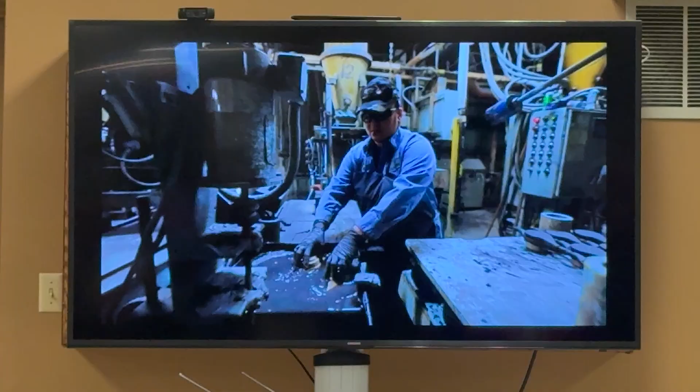So Fall River Foundry, we've been in business for 72 years. We were founded in 1953.

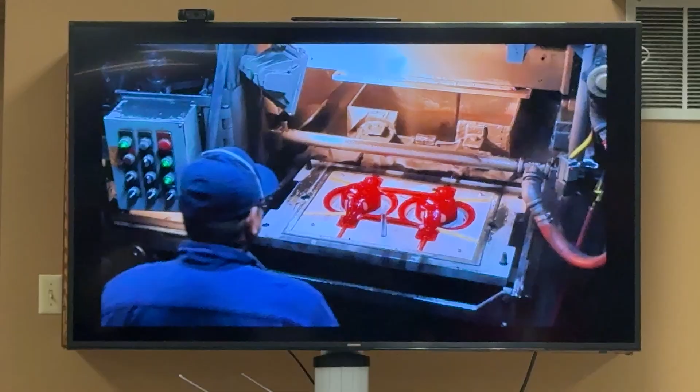I guess we'll just let this play out for a second. Yeah, a cold day.

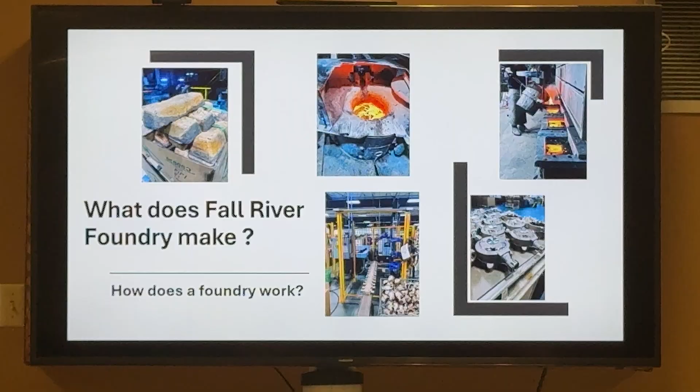All right, on to the history of Fall River Foundry. Again, I'm Brendan Weigel, President and CEO of Fall River Foundry. I'm going to do a quick overview of what we actually do.

We're a green sand foundry, that's what we're referred to as. So we're a green sand brass foundry, and what they mean by green sand is we use silica sand to produce our castings. We basically take what looks like beach sand, mix clay into it, and pack that into our molds, and that's what we use to create our castings. If you look back on the table, I actually brought a core with us too, which makes the internal geometry of our castings. That's a chemically bonded process, but everything we use is sand related at Fall River.

We primarily deal with the waterworks industry, so our forte is making water meters. So if you live in the city and you have a water meter in your house made out of brass, odds are we made it.

We were founded in 1953, and we actually were spun off from Badger Meter. Here's some of Badger Meter's original advertisements. Badger Meter was owned by a fellow named Charles W. Wright, and in 1952 he unexpectedly passed away. He was the sole owner of Badger Meter. So his twin sons took over the company, and in 1953 they elected to split off the foundry they had in Milwaukee. James Wright took over Badger Meter operations, and William Wright built Fall River Foundry.

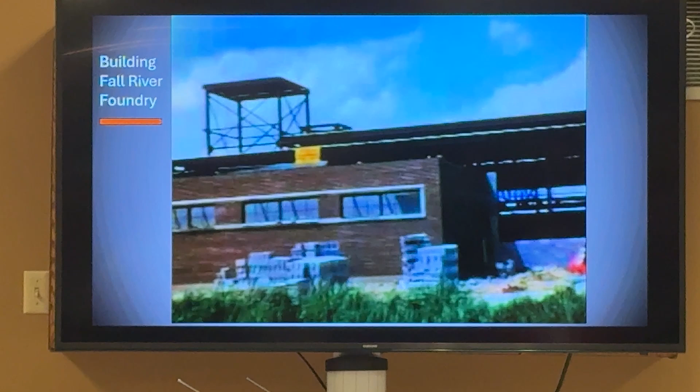Construction started in 1953, and we do have a video of that. There's the original building, this is from 1953. This is actually when the building was under construction. There's a YouTube link to this as well, which is pretty cool, looking at how they built heavy industry buildings back in the day.

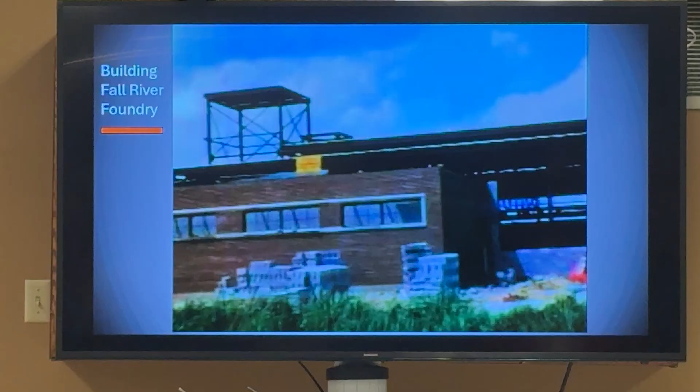Oh, we can't get the video to play, but that's fine. Anyway, William Wright started Fall River Foundry as sole owner. It started construction in '53, and had an open house in 1954, I believe in January.

Yeah, so the Columbus Journal Republican had a souvenir paper. We have a bunch of those still in our archives, but you can see January 2nd they had an open house. Operations didn't start then.

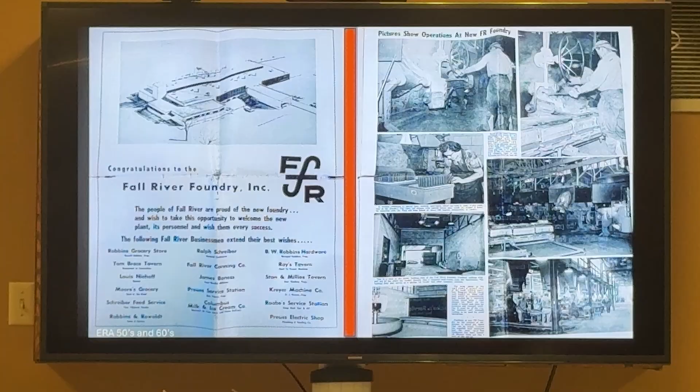It must have been that they had the equipment installed, and at the time it was kind of a showpiece for Fall River, with a foundry being built. Yeah, just some more of the original open house literature. And this is one of our molding lines - I'll get into this a little bit later.

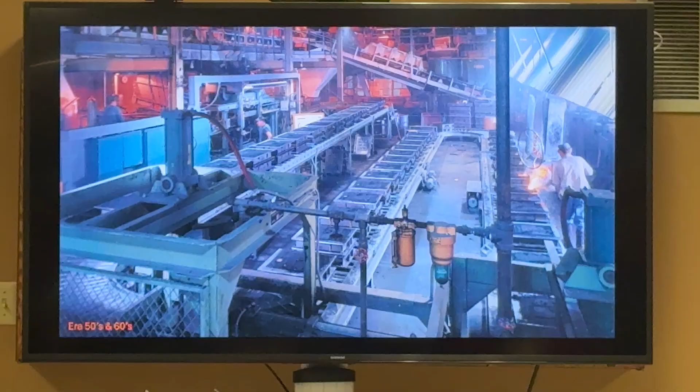So if you look back on the table, you'll see some of the old items that we have. But what's really priceless to me is I actually have the first mold ever poured in the foundry. It was poured in August of 1954. It was presented to the president at the time, and we've kept that. It's actually home on a shelf in my office.

Yes, we had the open house in 1954. So starting out, you had the two brothers, one having Badger Meter, one having Fall River Foundry. There was an agreement that Fall River Foundry would produce all of Badger Meter's castings, which we still do today. That was the start of Fall River Foundry.

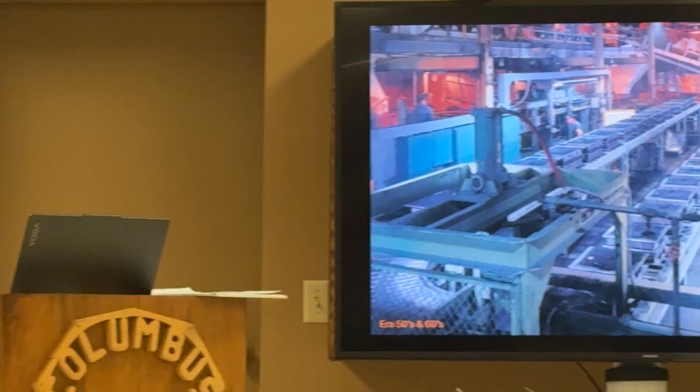Throughout the 60s, Fall River Foundry primarily just did work for Badger Meter. There was a little bit of jobbing work, and when I say jobbing work, that's producing castings for OEMs. We do not produce our own product - we produce castings, and now we machine them as well, for OEMs.

So when I say OEMs, like the water meter companies, we also do fire hydrants. Believe it or not, they make full fire hydrants out of brass, which is pretty cool. A lot of trim parts, a lot of fire protection. And if you look back on the table, we actually do cemetery bases as well - kind of a dying industry.

Throughout the 60s, we were primarily doing work for Badger Meter, a little bit of jobbing work, and this molding line was one of the first automatic molding lines put in a brass foundry. That was done during the 60s, and it really helped us progress in our production capabilities. Our output was much better because of it.

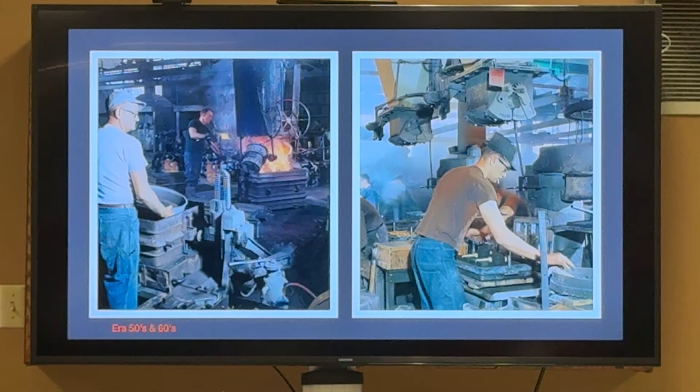Here's manual molding, so you can see it was done by hand. The sand was packed into molds by hand, which we still do today in part of our foundry for shorter runs. In the background of one picture, we're pouring the mold manually with a ladle. Those hold roughly about 300 pounds of metal, which we still use today. We've carried that tradition on and had a lot of skilled workers.

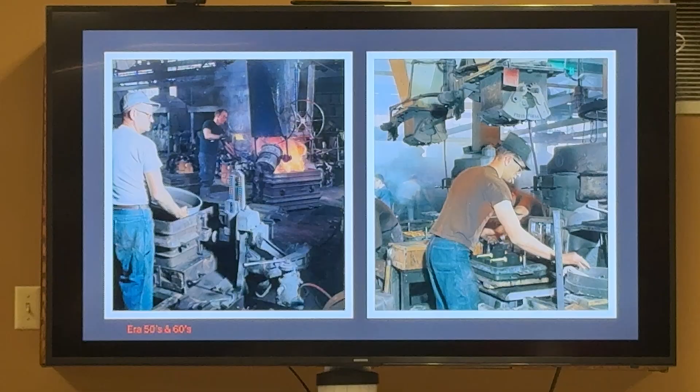The individual here, Russ Milkey, worked well into the 2000s, worked for us for well over 50 years. And we have a number of employees that have worked for us over 50 years.

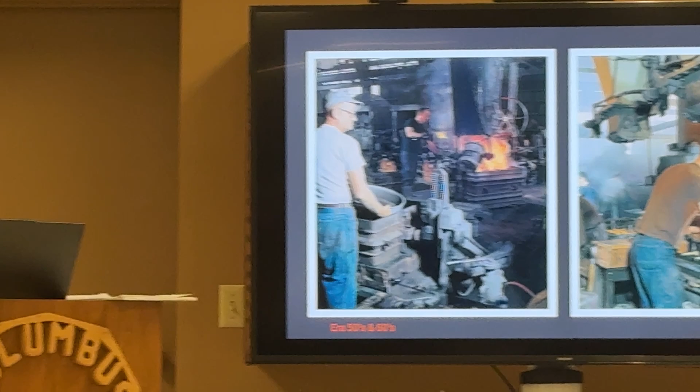The 1970s came around. My father, Ray Weigel, joined Fall River. He actually came from Milwaukee Valve when Milwaukee Valve had their foundry in Milwaukee. He was a plant superintendent, so he came to Fall River as plant superintendent, and over the years eventually became CEO and co-owner of Fall River Foundry.

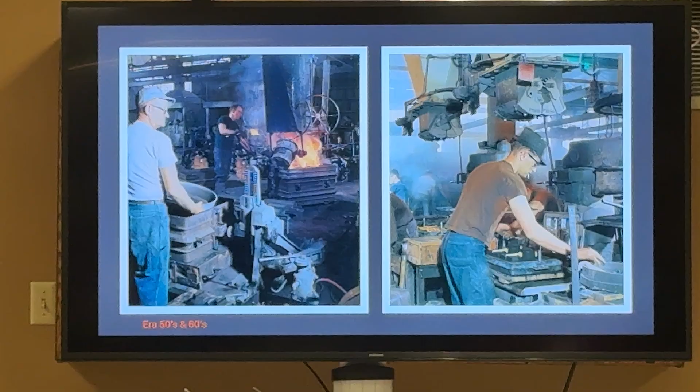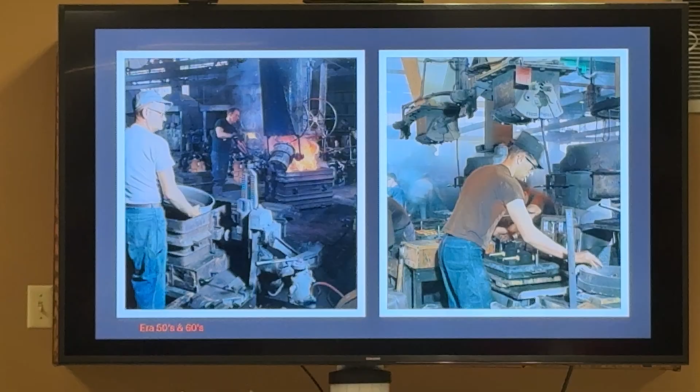Bill Wright's son, our original founder, Charlie F. Wright, took over ownership for the Wright family. He was somewhat involved in operations, but more on the financial side, so he actually started up some funds. He never was really directly involved in production at Fall River Foundry, but he's still vice chairman to this day.

Bill Wright's grandson is actually our vice president of operations at our die-cast facility, which I'll get into in a minute. In 1977, Fall River Foundry purchased Lemco Plastics in Germantown, and we dabbled in the plastics business for a little bit. Wasn't really our forte, it was kind of getting out of our wheelhouse. But at the same time, we were experimenting with what's called permanent mold in Fall River.

Permanent mold is a process where, instead of using sand, the molds are made out of steel, and we pour molten metal into the steel. We had that operation in Fall River for a short time, and eventually moved it down to Germantown, which then morphed into something else because that wasn't a process conducive for us.

So we elected to go into what's called a die cast process, which is high pressure die cast, where we're taking molten metal and hydraulically forcing that into metal molds. It forms a very tight, high tolerance casting, and we still have that facility today. It started out as Rio Cast, and that was in 1977.

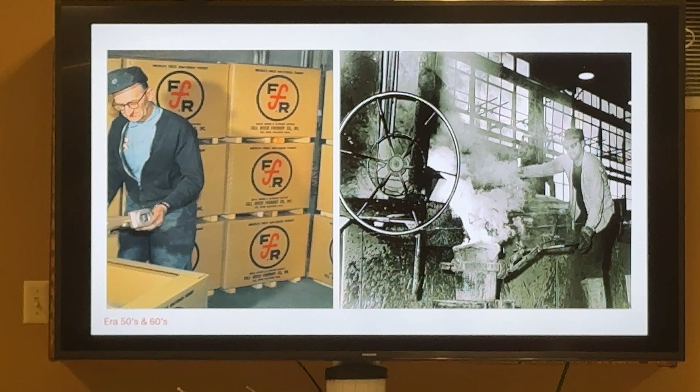Here's an individual filling a ladle, and that is actually John Vick's father. The other gentleman is named Tony Ergman, and he was one of the original employees that moved up from Milwaukee when Badger Meter had their foundry. He was our quality inspector for many years.

Just another picture from the 60s, and you can see the original foundry. It looks a little different than it does today - typical foundry with a lot of windows. Not very warm in the winter.

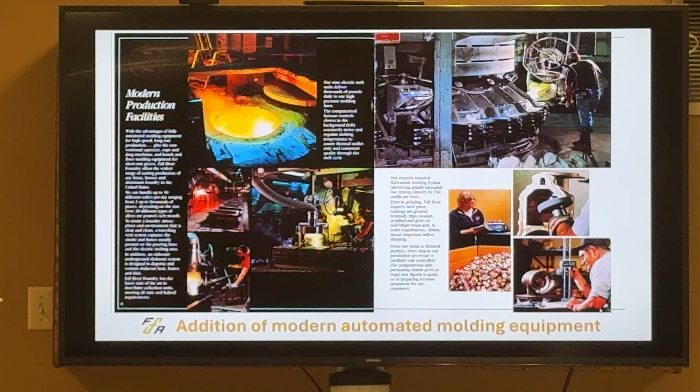This is now getting into the 80s here. This is just some of our brochures for sales. Major changes happened in the 1980s - we shifted from just doing castings. We started providing a little value added by machining our castings, so we became a foundry and machine shop.

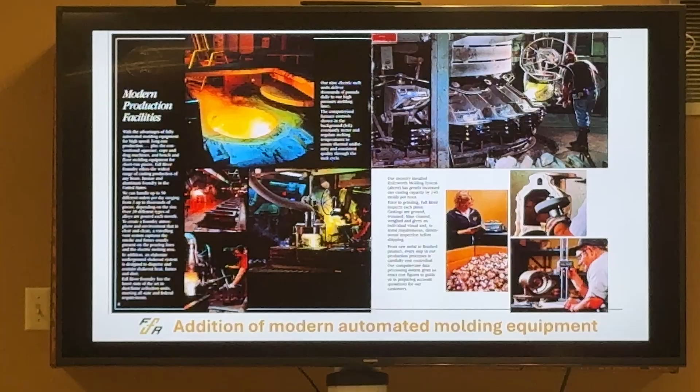We purchased what we call Fall River Manufacturing, which originally was Westlock Corporation on South 13th Street in Milwaukee, and we ran that facility for many years. The Westlock Corp had its own proprietary product - they did lock nuts and lock washers for the bearing industries, primarily for the paper mills. That was actually a proprietary product of ours. It was a screw machine shop, which there aren't many left in this country anymore.

And then we started machining our castings there. We saw there was a value add, and our customers - some of them were smaller customers - didn't really want to update their own machining, and we said, well, we can provide you a machine complete part. That's how we got into the machining business.

In 1988, we moved a division of our foundry to Rio, and that was our finishing process. After we cast our parts, they still have sand on them, they need to be cleaned, and then they need to be trimmed so they're presentable for our customers. If you look at the castings back on the table, there's what we call flashing - they need to be ground and re-cleaned so they're acceptable to our customers.

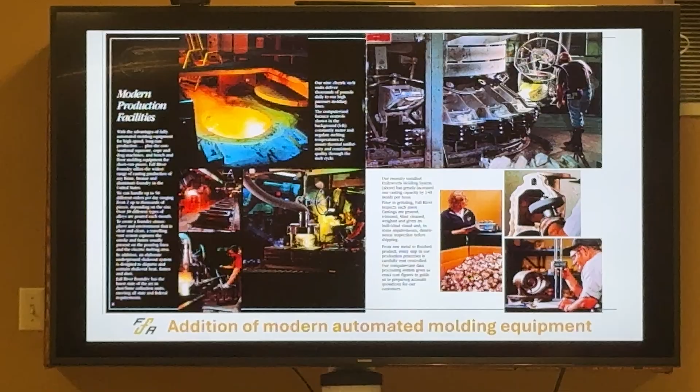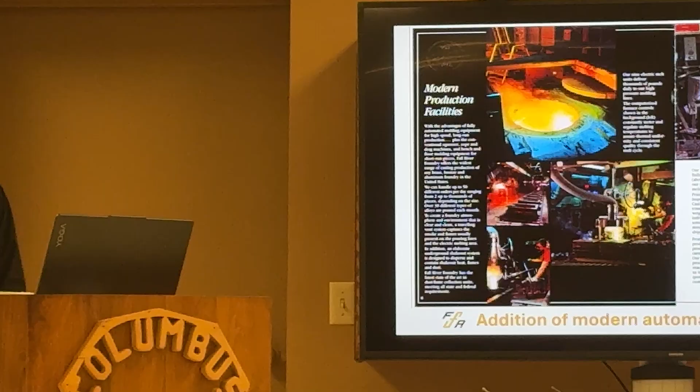So we moved that facility up to Rio, went relatively smooth. It was an existing plant, and we were kind of in a time constraint, so it was a pretty quick move. The equipment that we moved didn't involve a lot as far as rigging was concerned, so we got that plant up and running in a pretty short time, and it worked for us at that point in time.

Then we move into the 1990s, and I consider those our boom years. There was a lack of capacity in the United States for brass castings. There was a big demand. Housing was on fire, a lot of new construction. So we were doing a lot, not only for the water meter industry, the infrastructure, like fire hydrants and fire protections. The OEMs that have their own foundries were at capacity, so we were filling up the needs that they had. So we were quite busy through the 1990s.

So these are our different divisions, as you can see: Riocast, Fall River Manufacturing, Milwaukee, and then our Rio Finishing Plant.

Yeah, we'll go back to that. So this is a big event that happened with us in Fall River, and some of you probably remember it. September 8th, 1999, we had a disastrous fire. It destroyed two-thirds of our plant, our high volume automatic molding machine, all of our melters for melt capacity, our core room, which makes our internals for our castings - everything was destroyed.

The manual lines that you saw, that portion of the plant was damaged but non-functional for about two weeks. We were able to get that up and running. So during that time frame, from September to March, which doesn't seem like that long, we were outsourcing our parts, and in the meantime we were rebuilding our foundry.

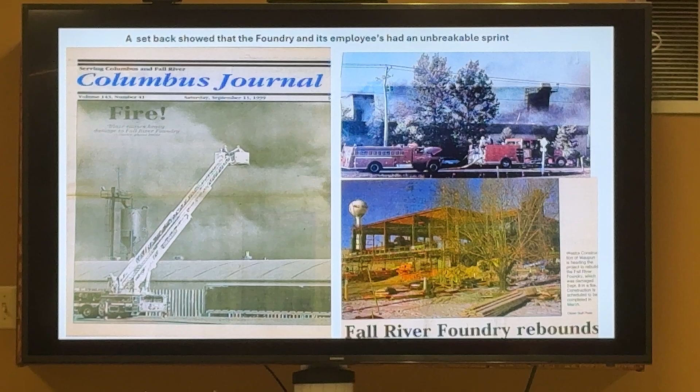And huge thanks goes out to my employees. We retained a lot of our employees to help out with castings that were getting shipped in for finishing on them, and inspecting them, and then just helping with the rebuild, installing new equipment. Westra Construction at the time was doing the building, did an outstanding job. Got us back up and running by March. We were pouring metal in March already, which today, I think back, it was quite a feat.

Anyway, so during that time, we had outsourced to 16 different brass foundries throughout the United States and Canada. And then for our core process, we had 3 different companies producing our cores as well. So kind of a logistic nightmare. But our customers stuck with us, and we got through it. And we were stronger and a better company after that.

And then the 2000s continued to grow, had more expansions, did more automating for the foundry because it's very hard work. So we were looking at ways to improve our molding and not make it so manually intensive. And so we did a lot of automation, added customers.

And in 2003, we elected to close down our Rio plant, put an expansion on, and move back to Fall River. We were getting busier, we were a growing company, and the logistics were getting to be too much, running trucks back and forth between the two towns. So we elected to put an addition on and move Rio back to Fall River, which I think was a fantastic move.

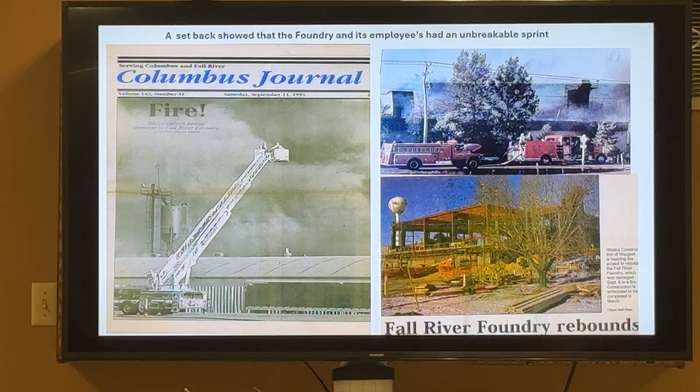And then in 2016, because a lot of our customers were doing their own machining and they've been bought out by larger conglomerates, and they just didn't want to put the investment into manufacturing, we saw a lot of our customers getting out of manufacturing themselves and becoming more reliant on us. So our machining end of business really blew up during the 2000s. So in 2016, we elected to put another addition on and moved our machining operations from Milwaukee to Fall River. So now we have cast and machine under one roof. We do leak testing as well on the parts, and we're able to meet our customers' requirements.

2024, we rebranded our die-cast facility from Riocast to Fall River Die-Cast. We felt it was a better fit from a marketing standpoint under the Fall River Group umbrella. And at that time, we also expanded our capacities down there with more machines, die-cast machines, and we've done quite well with growing that business.

So today, Fall River Foundry, believe it or not, is the largest brass jobbing foundry in the United States. Globally, I don't know where we stand because we really don't know what's going on in other countries, but we are a major player here in small Fall River. And we do about 1,400 tons per month of brass and bronze.

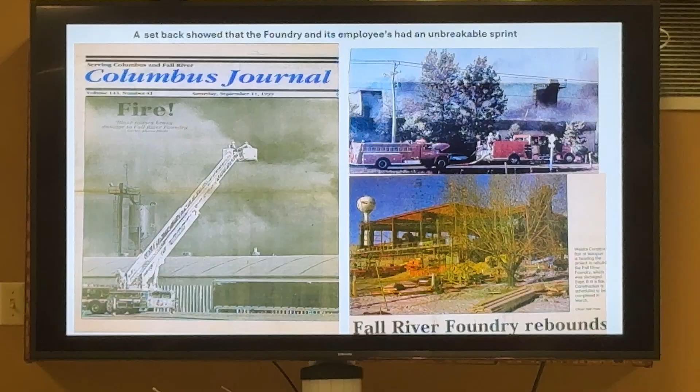And Fall River Die-Cast, we still do brass there. We do a lot of aluminum, but we do medium run type work, so we're not competing with the big automotive die-cast shops. But we're one of the last remaining brass die-casters here in the United States as well.

So if you want to take a minute to look at what we've got on the back table, you can see some examples of what we make, some of our history. I do have a core there. I've got a water meter that's unmachined, one that's machined, and then you can see the core that makes the internal sitting back there.